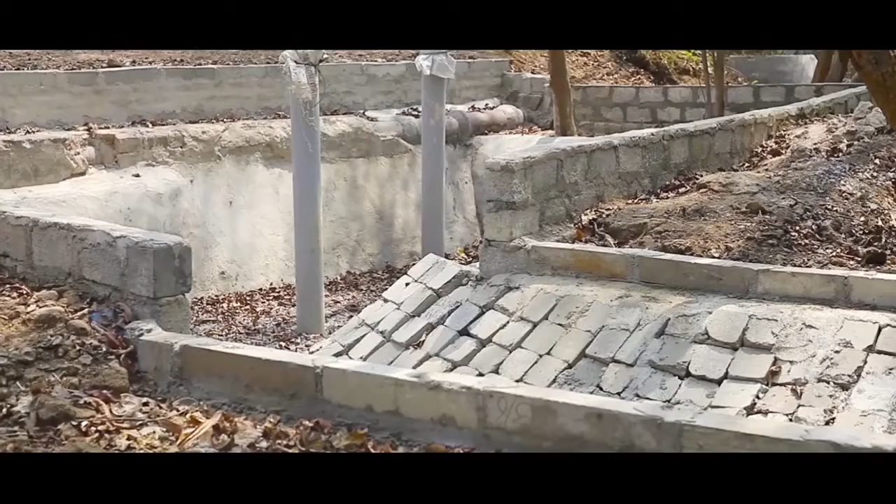Water, water everywhere, not a drop to drink. Isn't this what we feel after the rains? Puddles and water-filled potholes only make us wish that we could make use of the precious water. Actually, we can. Rainwater need not be wasted. Rainwater harvesting is the best way for using the rainwater.

In the last decade or so, the distribution of rainfall in many parts of the country is erratic and uneven, which causes water scarcity conditions in many parts of the country, due to which water is not sufficient for drinking, household, agriculture, industries, and other purposes. Also, the groundwater levels in many states have been depleting.

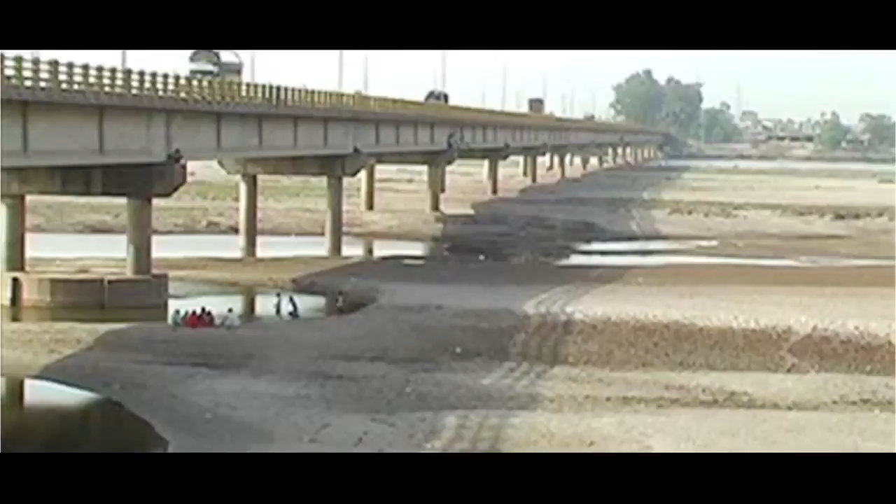We cannot produce water, but one thing is possible, that is to harvest the available rainwater, preserve it, save it, recharge it, conserve it, store it, and use it after proper treatment.

As we are all aware, 18% of the world population is in India, but we have only 4% of water resources. Whereas if you take into consideration the utilization of the water, more than 30% of the water is being utilized in India. This, if you take into account, is a huge utilization in India.

Because of urbanization, industrialization, and explosion of the population, the pressure is on the water resources, more particularly the groundwater resources. The most huge resource available in the world is groundwater, but utilization day by day is increasing tremendously. The pressure is very high on groundwater.

Because of overutilization of the groundwater resources, there are two kinds of problems arising out of it. One is the declining groundwater levels, and the other is the deterioration in quality of groundwater. Because of these problems, Ministry of Water Resources, Central Groundwater Board is taking up many artificial recharge structures to control the groundwater level decline and improve the groundwater quality.

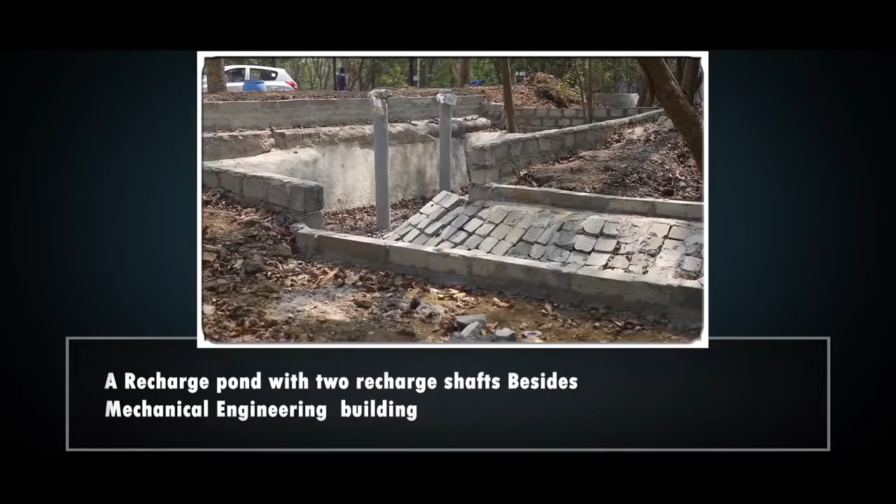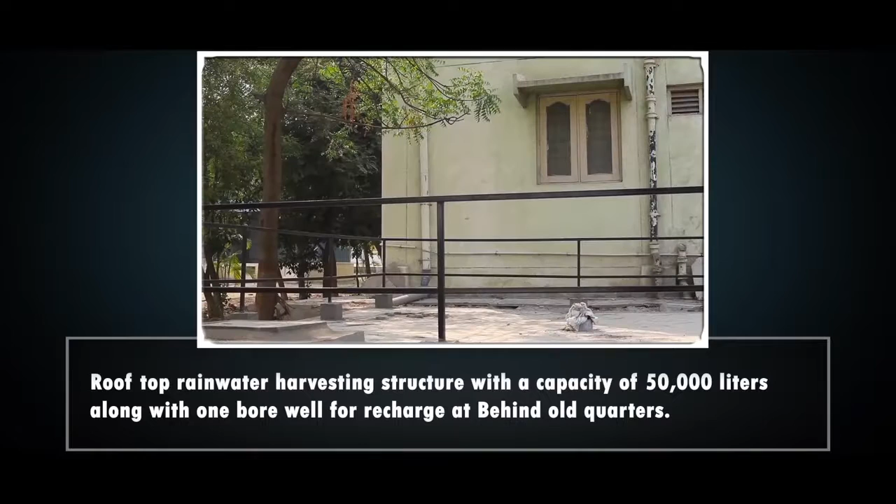Under this project, we have constructed 10 rainwater harvesting structures in the university, including 3 piezometers, which are a recharge pond with 2 recharge shafts besides the mechanical engineering building, a rooftop rainwater harvesting structure with a capacity of 50,000 liters along with 1 borewell for recharge behind old quarters, a rooftop rainwater harvesting structure with a capacity of 50,000 liters along with 1 borewell for recharge at new quarters,

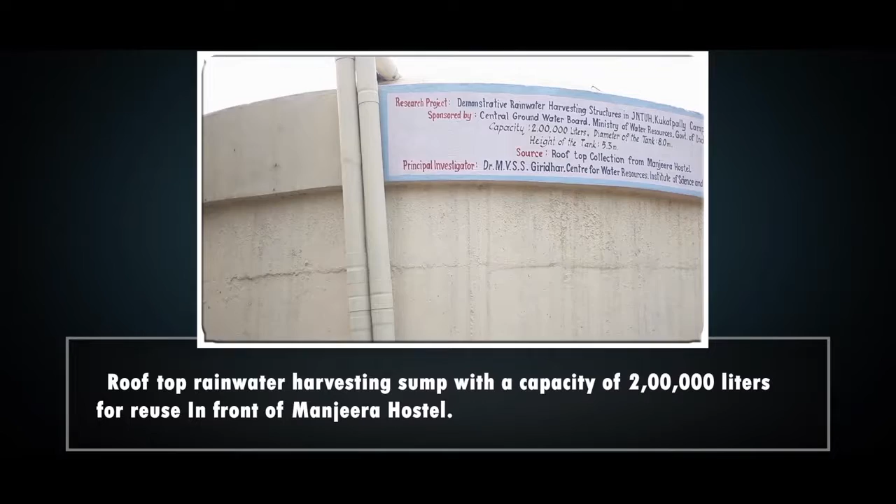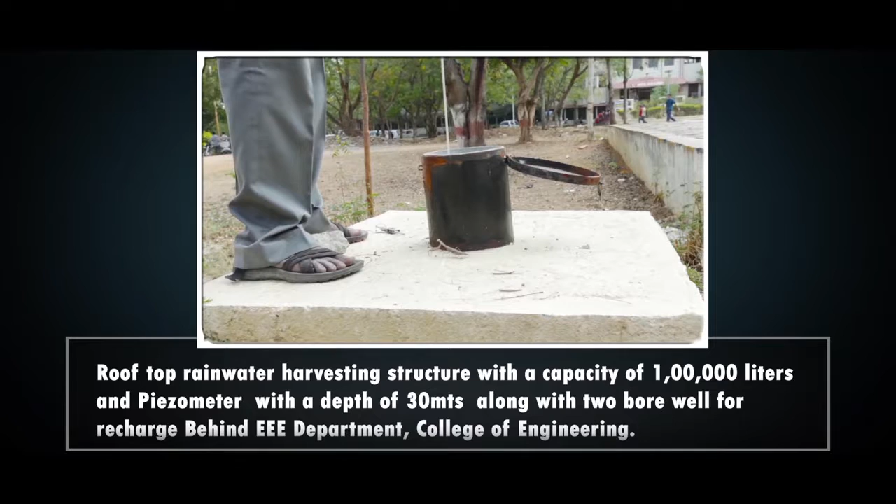a rooftop rainwater harvesting sump with a capacity of 2 lakh liters for reuse in front of Manjeera Hostel, a rooftop rainwater harvesting structure with a capacity of 1 lakh liters and piezometer with a depth of 30 meters along with 2 borewells for recharge behind the EEE Department, College of Engineering,

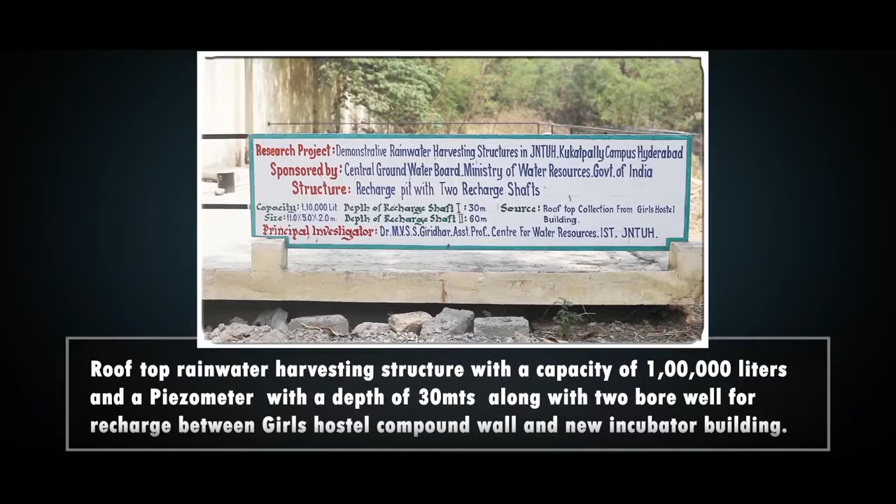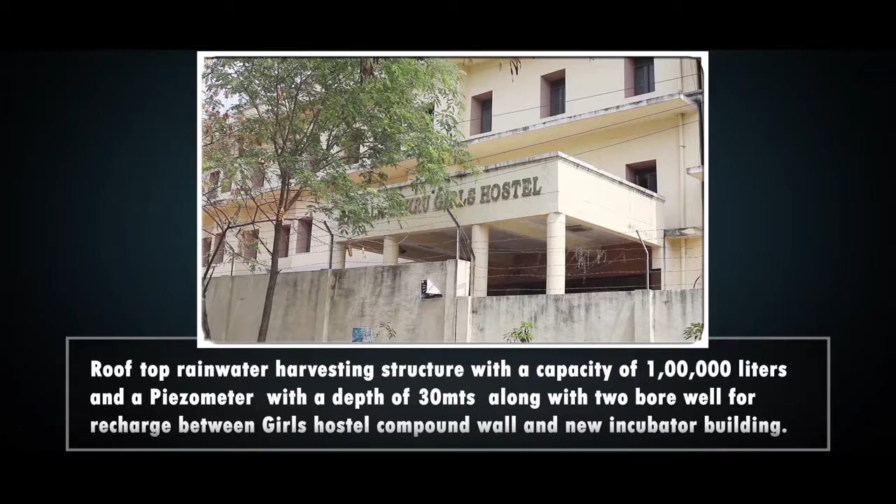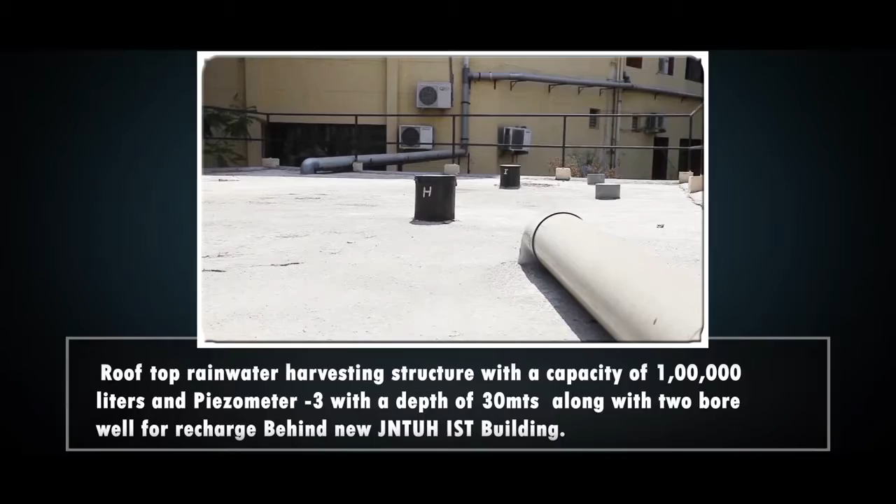a rooftop rainwater harvesting structure with a capacity of 1 lakh liters and a piezometer with a depth of 30 meters along with 2 borewells for recharge between Girls Hostel compound and new incubator building, and a rooftop rainwater harvesting structure with a capacity of 1 lakh liters and piezometer 3 with a depth of 30 meters along with 2 borewells for recharge behind JNTUH IST building.

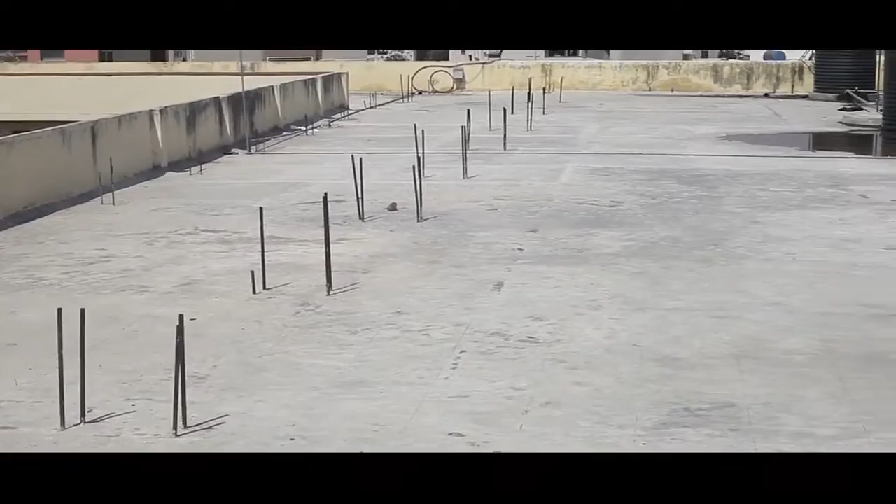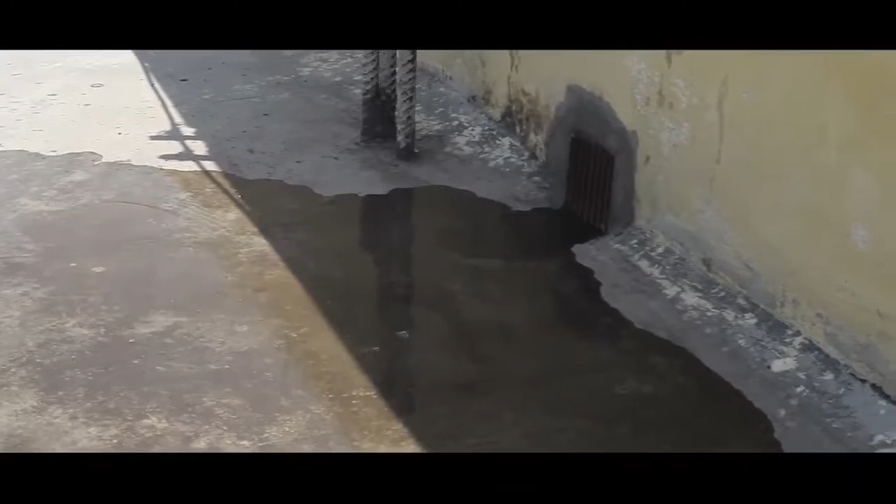Manjeera Boys Hostel. Manjeera Hostel building has a rooftop area of 620 square meters. The rainwater falling on the roof of this hostel is directed to the circular storage tank of 2 lakh liter capacity. The rainwater available from the roof of the building alone is about 4 lakh liters per year. The water is made to flow through PVC pipes of 4-inch and 6-inch diameter into the tank. Proper filtration system has been made at the inlet point of the storage water tank. The water stored into the tank is used for domestic purposes of the students residing in the hostel.

Technical specifications of the 2 lakh liter structure located in front of Manjeera Hostel, JNTUH campus. Capacity of the tank: 2 lakh liters. Diameter of the tank: 8 meters. Height of the tank: 5.3 meters. Rooftop area: 620 square meters. Maximum rainwater that can be harvested in a year: 4 lakh liters. PVC pipeline used: 4-inch and 6-inch diameter.

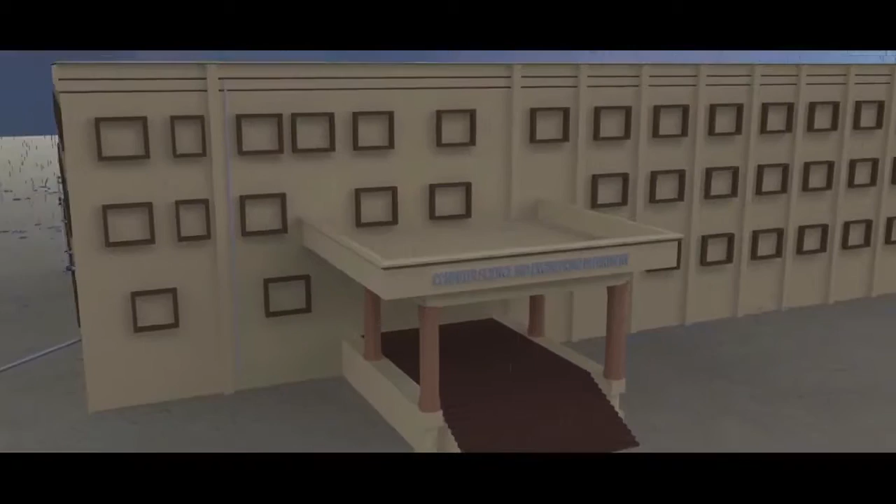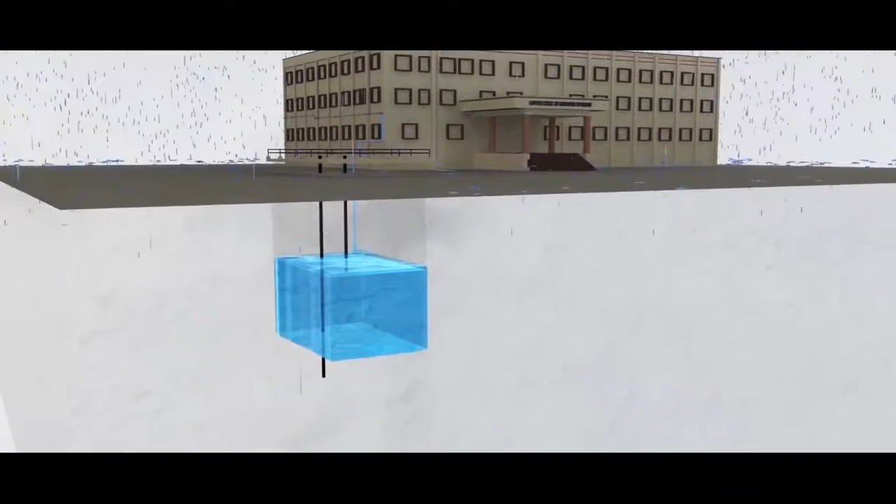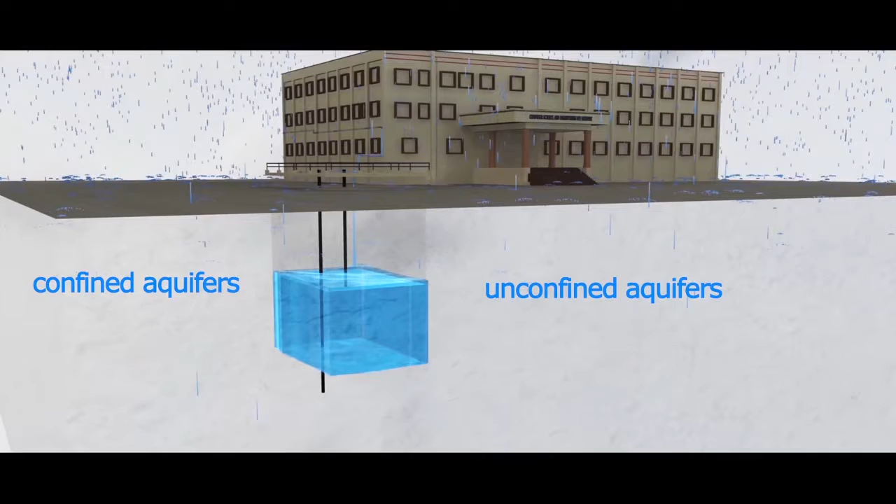Rainwater falling on the roofs of 11 buildings situated in the university campus is collected through PVC pipes of different diameters through telescopic design. After proper filtration, water is allowed to store in the sumps. In each structure, recharge wells are established in the sumps to inject water into confined and unconfined aquifers directly. The diameter of the recharge shaft is 200 mm. These wells are used to recharge both confined and unconfined aquifers situated at various depths below the ground surface. These recharge shafts are more beneficial for deep depleted aquifers and also where economy of space is an important criterion.

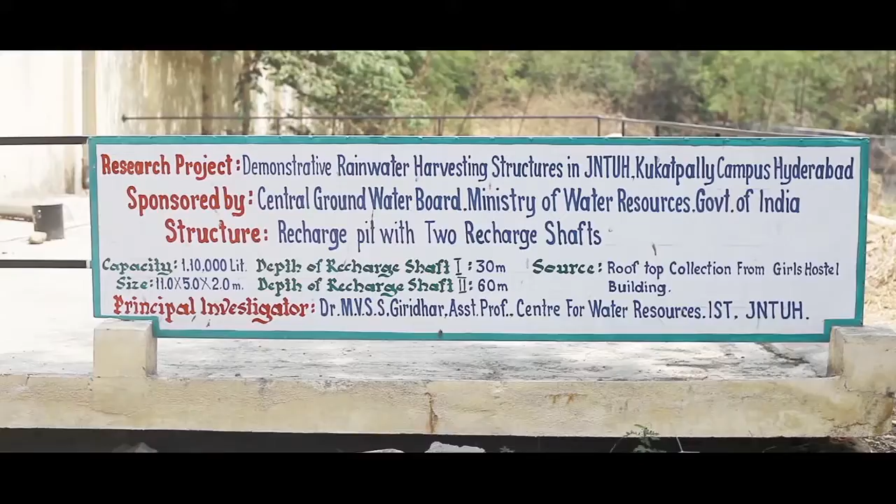A total of 5 rainwater harvesting structures were established in the campus in Phase 1 and Phase 2 of the project for recharge purposes. The technical details about these structures are explained in the following video. Recharge structure with a capacity of 1 lakh litre along with 2 recharge shafts in the tank for percolation, located behind the EEE department, College of Engineering JNTUH, which covers the rainwater coming from the buildings of Civil Engineering and Library. Total rooftop area is 1020 square meters. The rainwater available from the roof of these buildings is about 6.60 lakh litres per year.

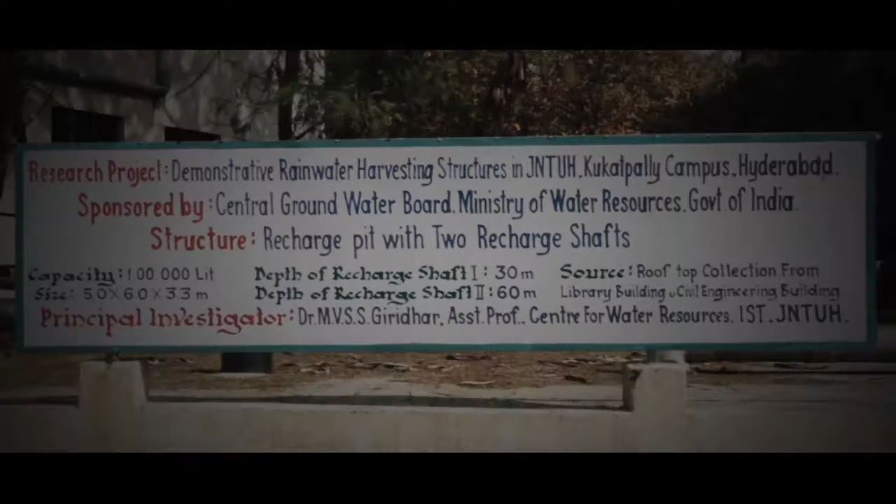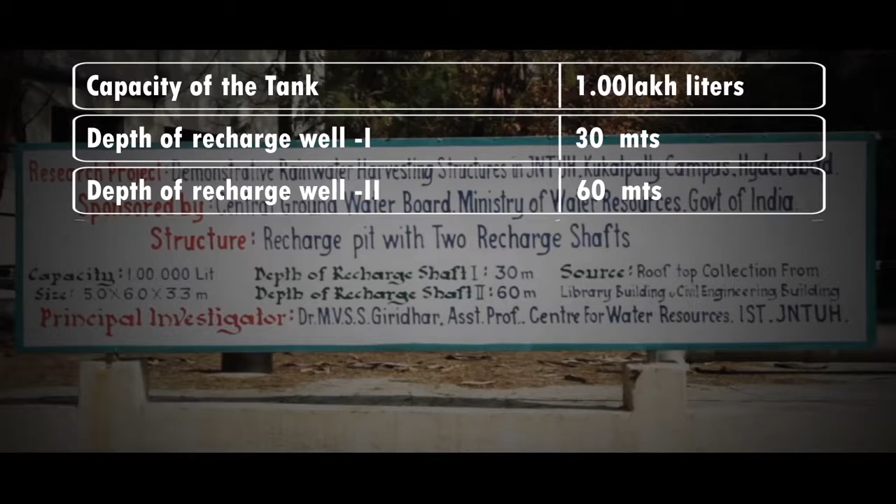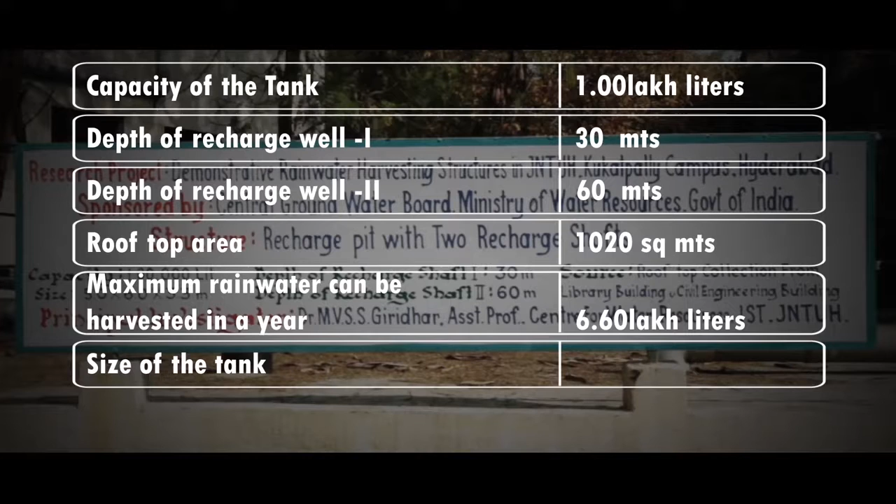Technical specifications of the 1 lakh litre structure located behind EEE building. Capacity of the tank: 1 lakh litre. Depth of recharge well 1: 30 meters. Depth of recharge well 2: 60 meters. Rooftop area: 1020 square meters. Maximum rainwater that can be harvested in a year: 6.60 lakh liters. Size of the tank: 5 meter into 6 meter into 3.3 meter. PVC pipeline used: 4 inch and 6 inch diameter.

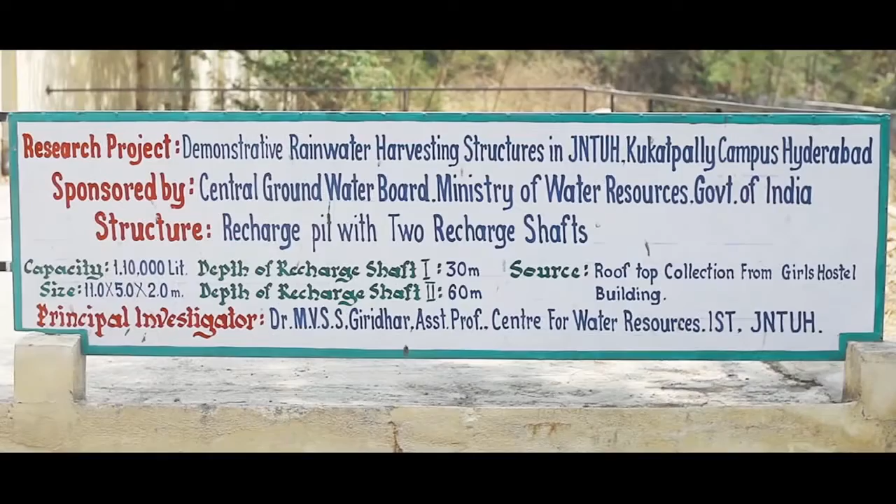Recharge structure with a capacity of 1 lakh liters along with 2 recharge shafts in the tank for percolation between Girls Hostel compound wall and new incubator building JNTUH, which covers the rainwater coming from the Girls Hostel building. Total rooftop area is 1282 square meters. The rainwater available from the roof of the building is about 8.30 lakh liters per year. Stages of construction.

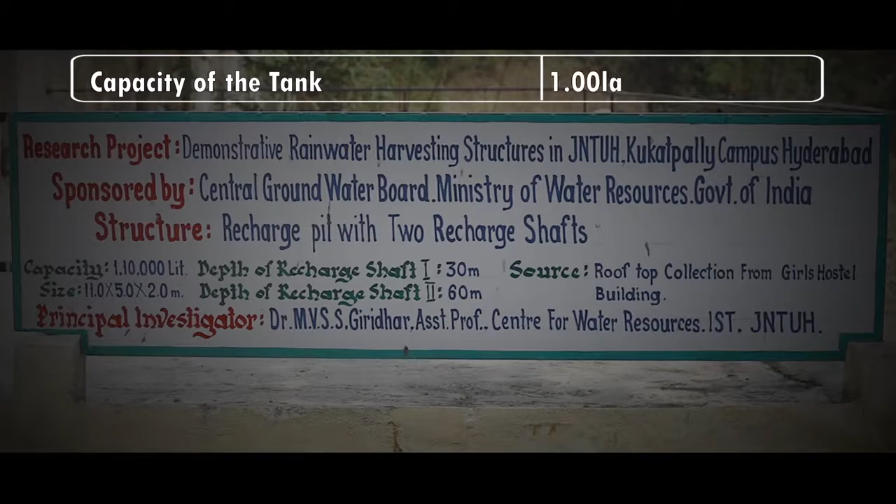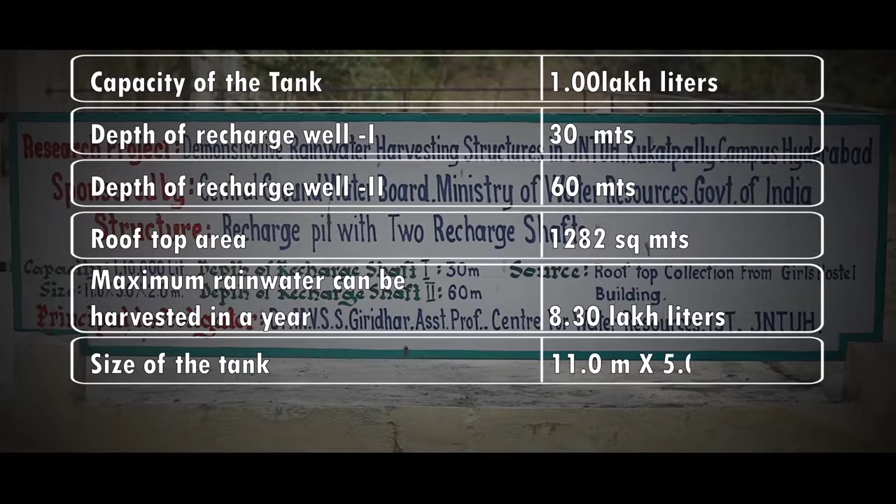Technical specifications of the 1 lakh litre structure located between Girls Hostel compound wall and new incubator building. Capacity of the tank: 1 lakh litres. Depth of recharge well 1: 30 meters. Depth of recharge well 2: 60 meters. Rooftop area: 1282 square meters. Maximum rainwater that can be harvested in a year: 8.30 lakh liters. Size of the tank: 11 meter into 5 meter into 2 meter. PVC pipeline used: 4 inch and 6 inch diameter.

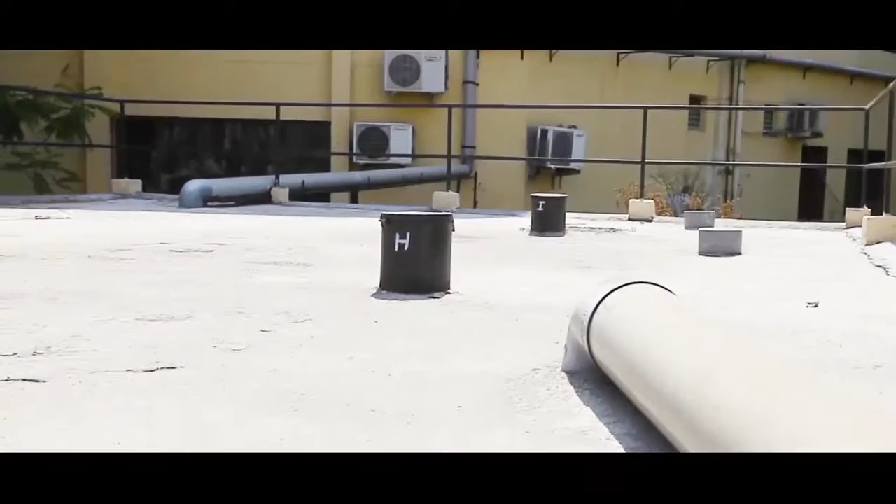Recharge structure with a capacity of 1 lakh litre along with 2 recharge shafts in the tank for percolation between New Institute of Science and Technology building and Computer Science Engineering building JNTUH, which covers the rainwater coming from the IST and CSE buildings. Total rooftop area is 681 square meters. The rainwater available from the roof of these buildings is about 4.50 lakh liters per year. Technical specifications of the 1 lakh litre structure located between New Institute of Science and Technology building and Computer Science building. Capacity of the tank: 1 lakh liters.

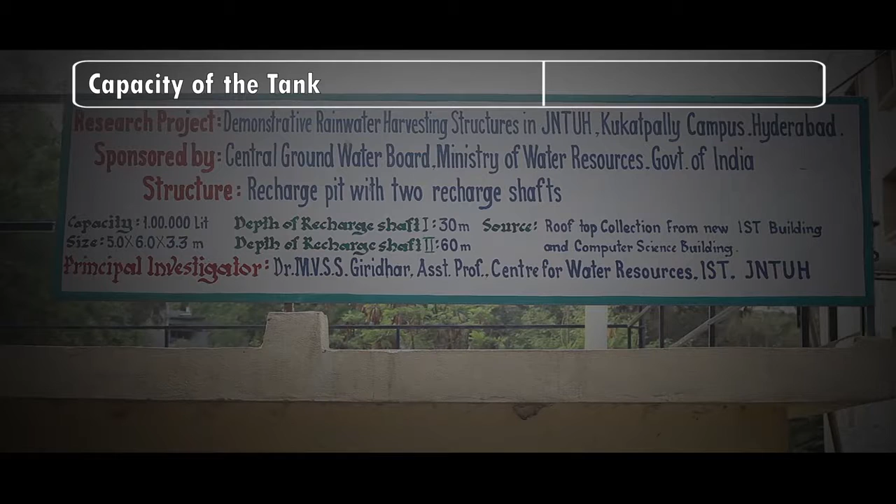Depth of recharge well 1: 30 meters. Depth of recharge well 2: 60 meters. Rooftop area: 681 square meters. Maximum rainwater that can be harvested in a year: 4.50 lakh liters. Size of the tank: 5 meter into 6 meter into 3.3 meter. PVC pipeline used: 4 inch and 6 inch diameter.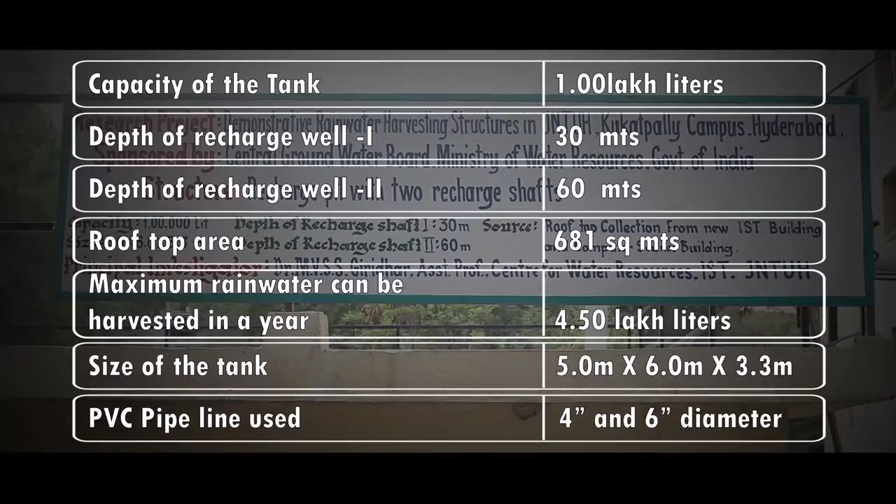A recharge structure with a capacity of 50,000 liters along with one recharge shaft in the tank for percolation located between new quarters JNTUH, which covers the rainwater coming from the building of B5, A3, RSQ1 and RSQ2 quarter buildings. Total rooftop area is 2216 square meters. The rainwater available from the roof of these buildings is about 14.36 lakh liters per year.

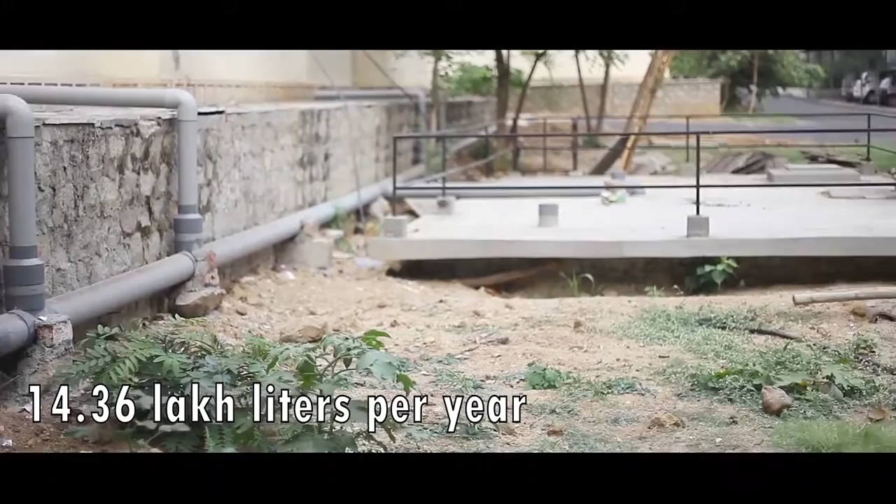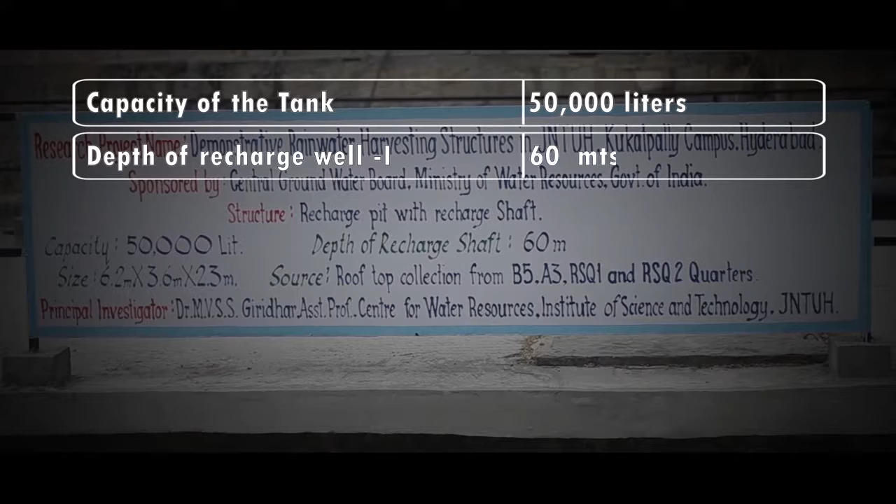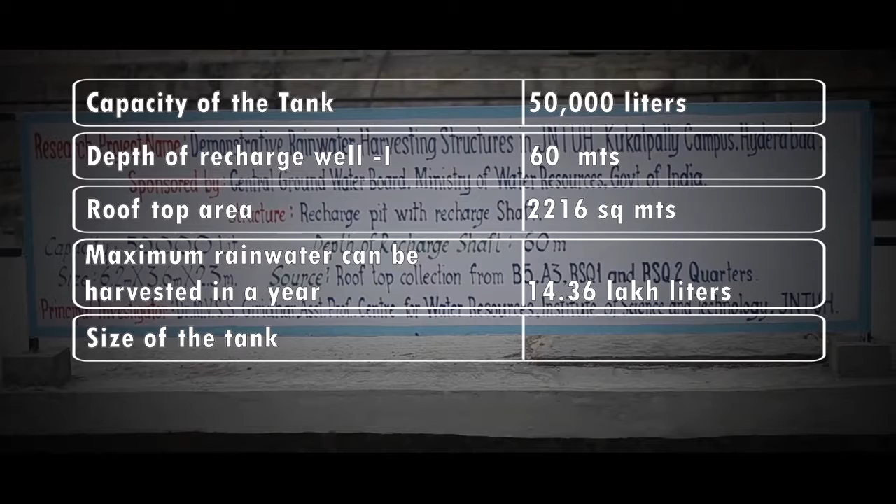Technical specifications of 50,000 liter structure located behind new quarters JNTUH. Capacity of the tank: 50,000 liters. Depth of recharge well 1: 60 meters. Rooftop area: 2216 square meters. Maximum rainwater that can be harvested in a year: 14.36 lakh liters. Size of the tank: 6.2 meters into 3.6 meters into 2.3 meters. PVC pipeline used: 4-inch and 6-inch diameter.

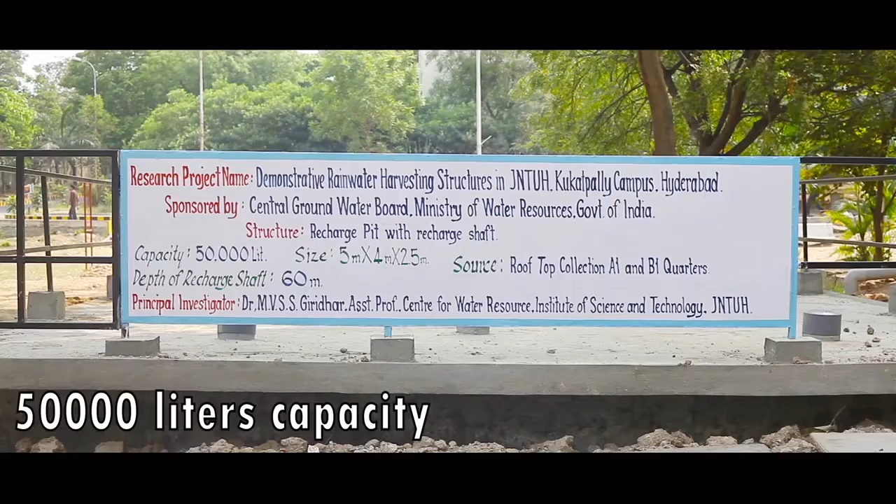Recharge structure with a capacity of 50,000 liters along with one recharge shaft in the tank for percolation located between old quarters JNTUH, which covers the rainwater coming from the building of A1 and B1 quarters building. Total rooftop area is 975 square meters. The rainwater available from the roof of this building is about 6.50 lakh liters per year.

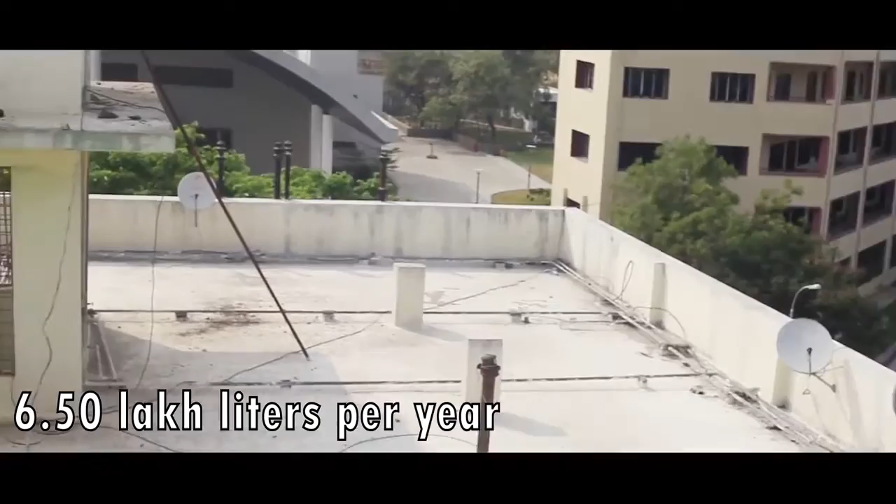Technical specifications of 50,000 liter structure located behind old quarters JNTUH. Capacity of the tank: 50,000 liters. Depth of recharge well 1: 60 meters. Rooftop area: 975 square meters. Maximum rainwater that can be harvested in a year: 6.50 lakh liters. Size of the tank: 5 meter into 4 meter into 2.5 meter. PVC pipeline used: 4-inch and 6-inch diameter.

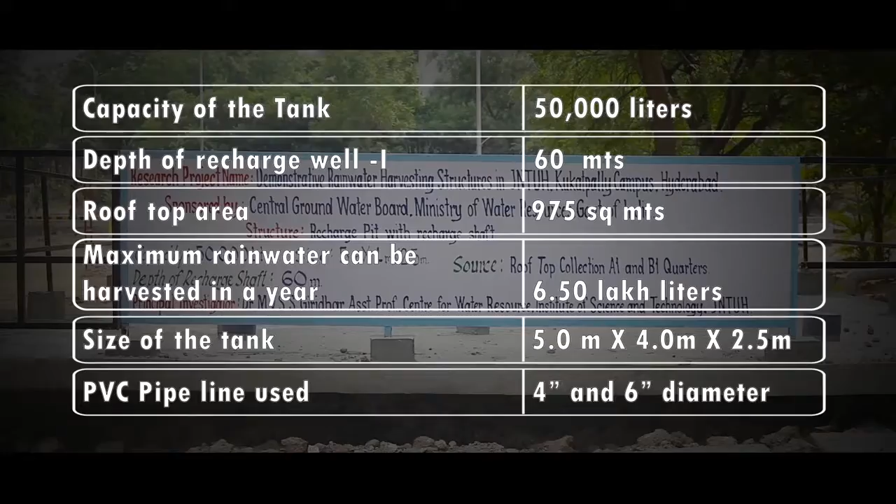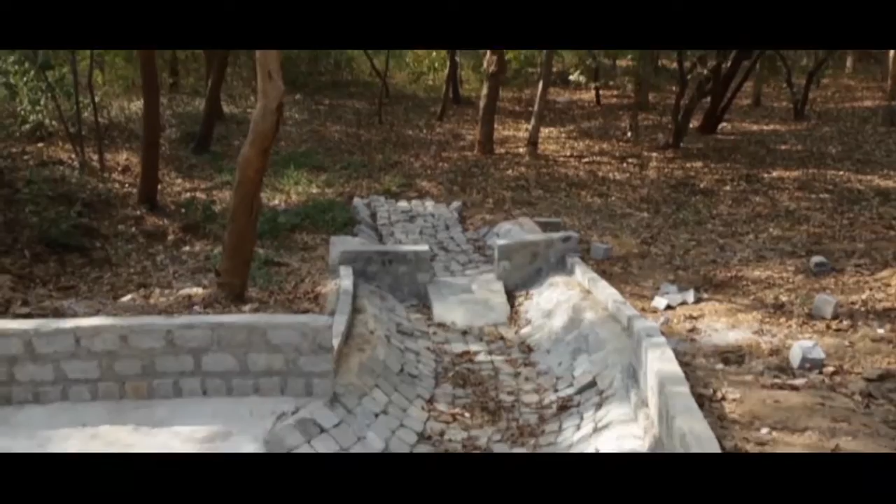There are 3 distinct watersheds covering JNTUH campus from which surface runoff is harvested for recharging the groundwater aquifers. Recharge pond with silt trap, inlet and outlet is constructed near Mechanical Engineering Department. Filtration bed is provided at the bottom surface of the pond. Rainwater will enter into the recharge shaft after proper filtration through filter media. 2 recharge shafts are also established within the recharge pond. The diameter of recharge shaft is 6 inch. These wells are helpful in recharging aquifers at various depths below the ground surface.

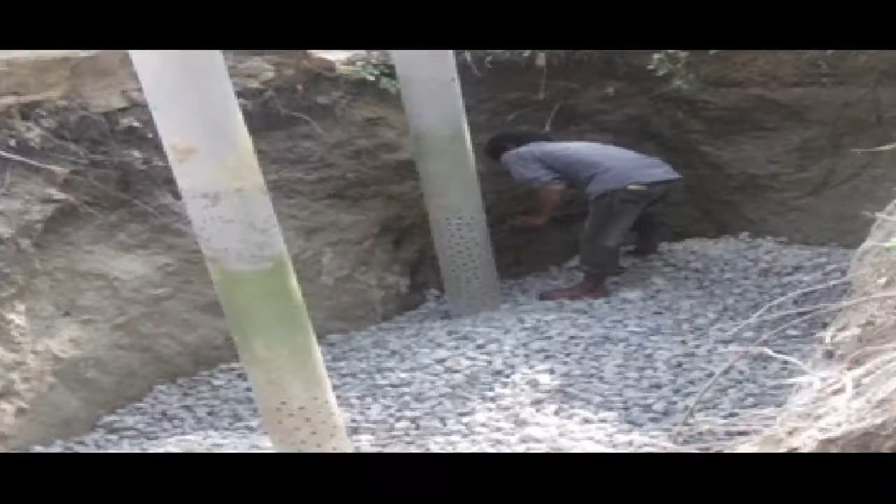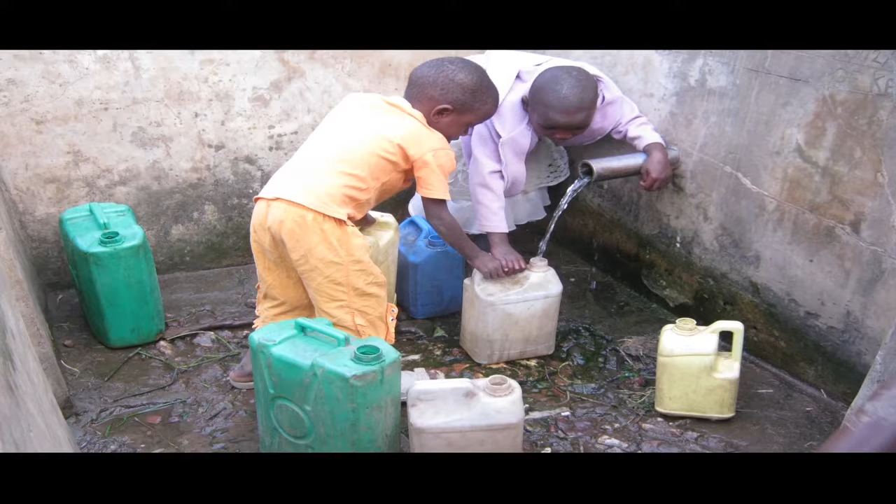All the above rainwater harvesting structures have been funded by Ministry of Water Resources, New Delhi, Government of India through the Central Groundwater Board Southern Region, Hyderabad, under Central Sector Scheme, Groundwater Management and Regulation. All the rainwater harvesting structures constructed under this scheme are currently functioning at the JNTU University campus as one of many measures taken by the organization to create awareness about the conservation of rainwater. This is an important step in the right direction. Conservation of water is essential not only for the present but also for our future. Water is our lifeline. Remember, catch every drop of water when it falls on a rainy day.

The JNTUH authorities are monitoring the quality and quantity of groundwater in the campus. With the existing rainwater harvesting structures, we can collect around 75 lakh liters of rainwater in any normal rainfall year. Last year, after completion of the structures, we have collected about 21 lakh liters of rainwater. The JNTUH authorities have collected 4 lakh liters of rainwater and used it for the students of Manjeera Hostel.

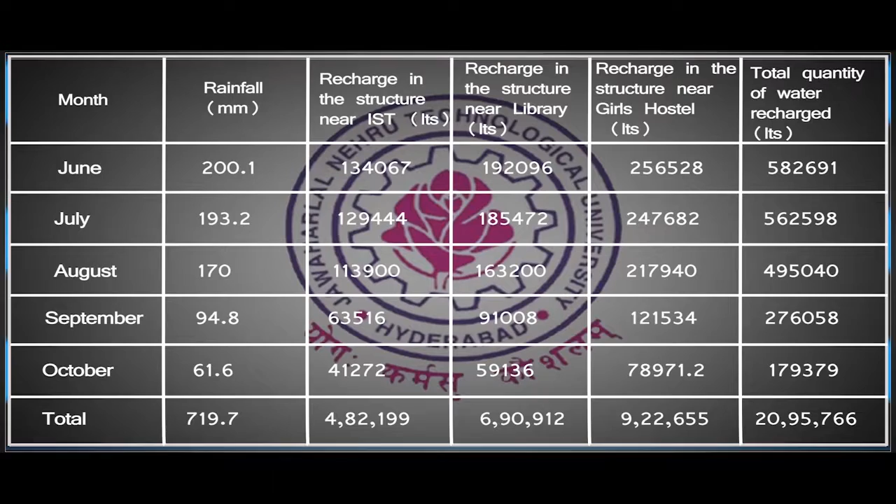The authorities have observed 7.5 meter rise in the static groundwater level in the piezometers at different locations in the campus. Water levels measured in the 3 borewells on daily basis during the monsoon period were found to be 22.6, 23.6, 10.1 meter on 15 June 2012, and the corresponding water levels have been improved to 14.63, 16.46, 3.35 meter respectively on 1st October 2012; a corresponding rise of 7.97, 7.14 and 6.75 meter in groundwater levels has been registered, indicating significant improvement of groundwater levels. The monthly recharge in the structure of JNTUH campus due to the rainwater harvesting is as follows. Monthly use of harvested rainwater through the recharge structure at JNTUH campus.

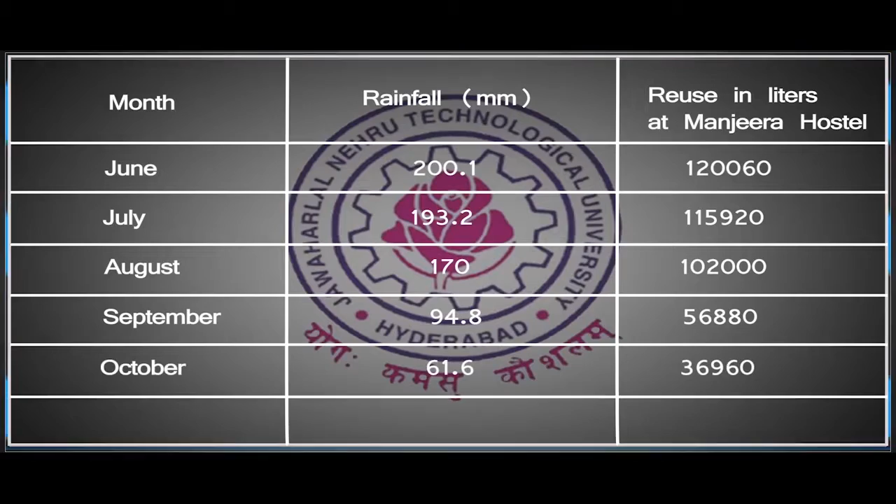I am specially thankful to the Ministry of Water Resources, New Delhi, for funding this project. I personally thank all the officers of the Central Groundwater Board, Southern Region, Hyderabad, for their continuous technical support and approvals. Special thanks to Dr. Varadaraj, Member, Central Groundwater Board, Sri G. Sudarshan, Regional Director, Central Groundwater Board, Dr. P. N. Rao, Superintending Hydrogeologist, CGWB, Hyderabad.

I thank our Honorable Vice Chancellor, Professor Rameswar Rao, Rector, Professor E. Saibaba Reddy, Registrar, Professor N. V. Raman Rao, Director, Academic and Planning, Professor G. K. Viswanath, Director, IST, Professor K. Mukkanti, Head Center for Water Resources, Professor K. Rammohan Reddy, and all other officers, teaching staff and students for their constant encouragement and support throughout the implementation of the project. Without their support, the project may not have turned out to this shape. Thank you.